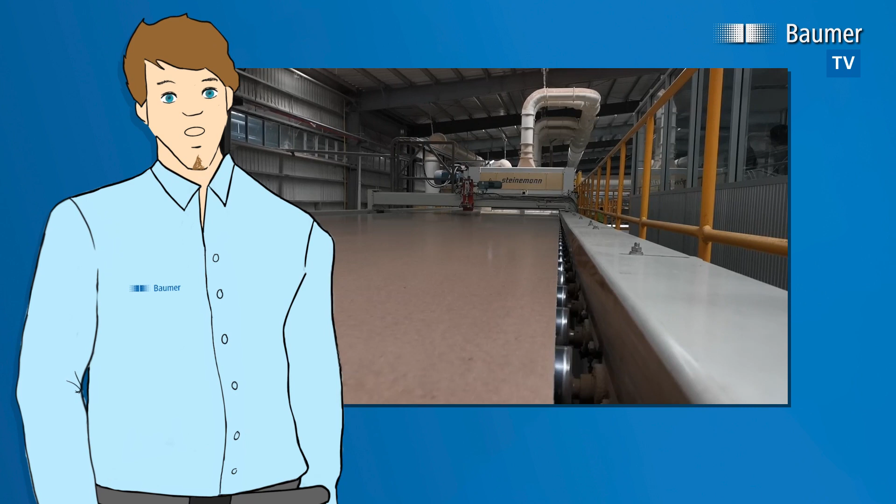Today, a Raw Board 4.0 system will serve as an example for the cooperation with a Baumer inspection system. Such a system is used in chipboard and fiberboard production after the raw boards have been sanded. Other typical applications for Baumer systems are lines for decorating panels and web goods, from coated, lacquered or sheathed panels to profiled floorboards as well as edged and drilled furniture parts.

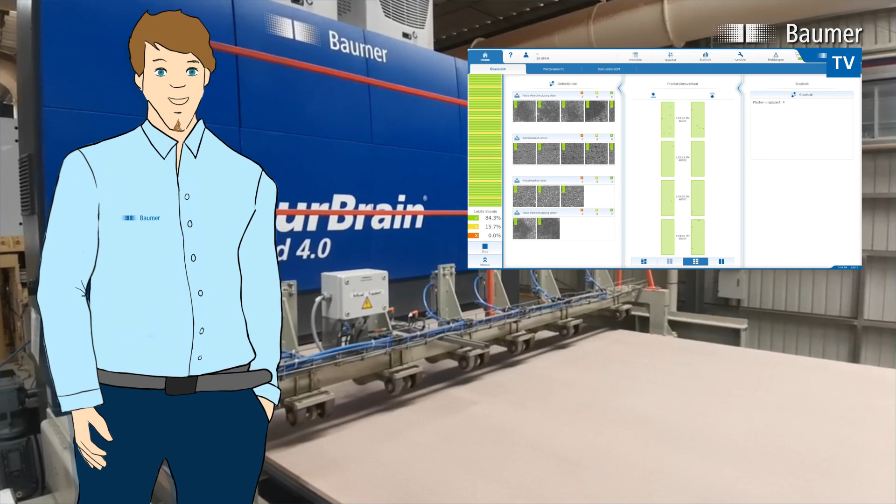Before we take a closer look at the raw board inspection, we would like to take a look at the cockpit of the Baumer system. The operator terminal provides an overview of the current production. The inspection results with the panel qualities, defects as well as the production statistics are displayed scalable over different time periods, from the single view of a panel up to a period of several minutes or hours. Click to select the view and time period for displayed results and statistics.

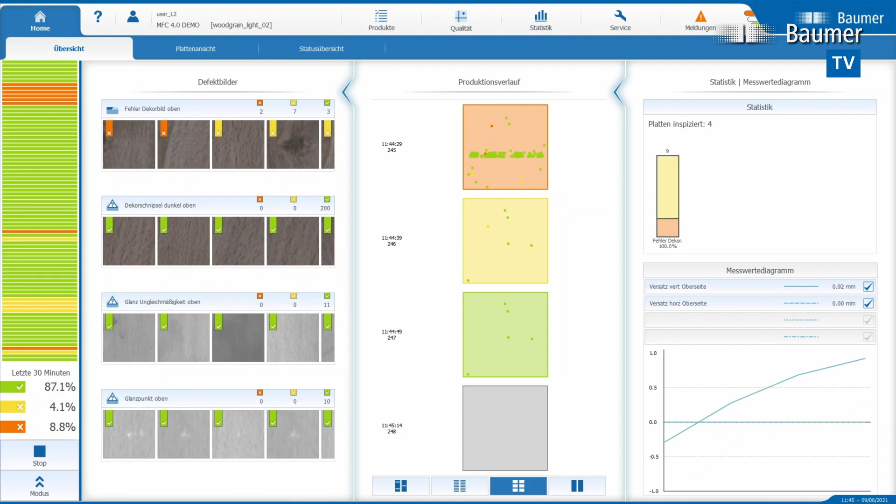The panel evaluation distinguishes between the grading levels: green, equal to first choice; yellow, equal to warning or second choice; red, equal to rejects; and gray, equal to not evaluated. The statistics display provides information about the quality distribution within a defined period. The defect log shows the detected defects in the defined period. On click, details such as type, rating and size of the defects are displayed in addition to the images.

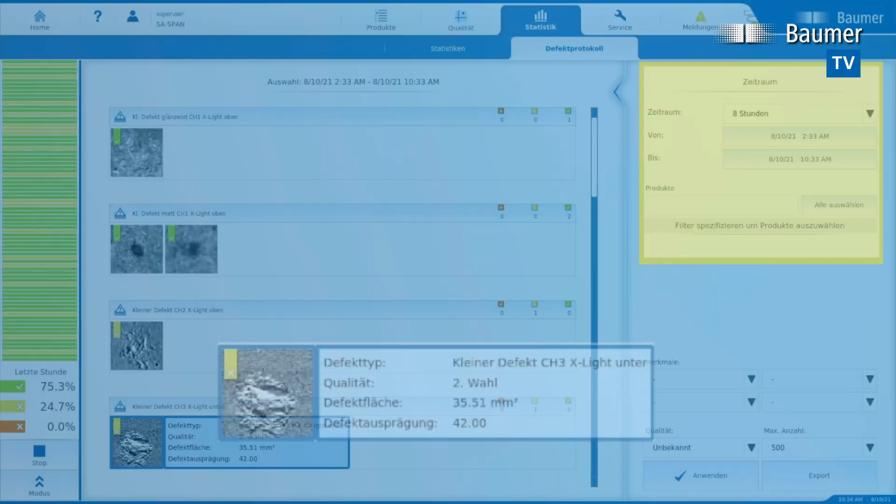Every producer wishes for such a good production. Unfortunately, this is not the case every day. The inspection system alerts non-tolerable defects. In this example, a dent was detected. On click, the position of the defect and the defective panel area are displayed in the zoom.

The following example shows the effect of an unclean grinding process. If the surface is not ground correctly, the system reports grinding errors. If this error accumulates, the sanding unit must be corrected to avoid this systematic error.

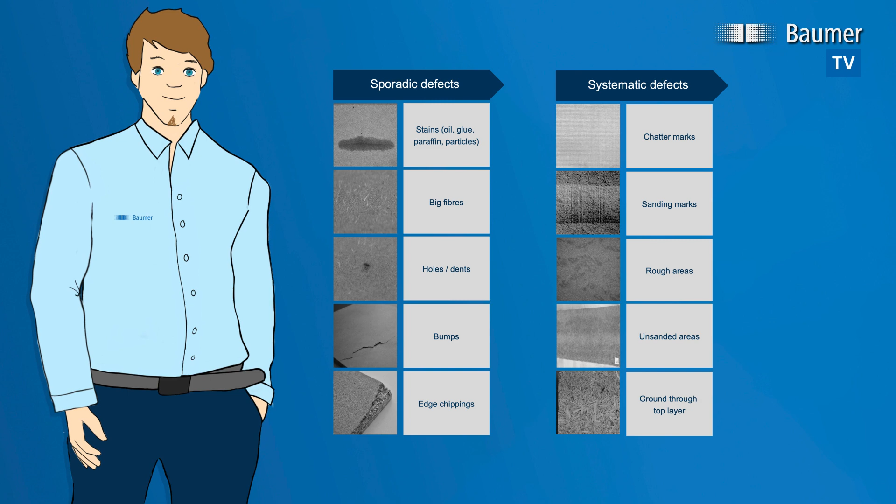In terms of defects, the inspection system distinguishes between sporadic and recurring, systematic defects. Systematic defects include, for example, chatter marks, rough spots, unsanded and sanded through panel areas. These can often be prevented by adjusting the sanding unit. Unfortunately, I have to live with sporadic defects such as too large fibers, dirt or damage. They cannot be prevented, but the intolerable bad panels are sorted out in any case. Sporadic and occasional large fibers are accepted by the system and do not lead to the panel being degraded.

Faults, on the other hand, always lead to alarms. Particles on luminaires or mirrors in the inspection system, for example, create a continuous line in the image, which leads to a degradation of the panels. In this case, it is advisable to interrupt production to eliminate the malfunction.

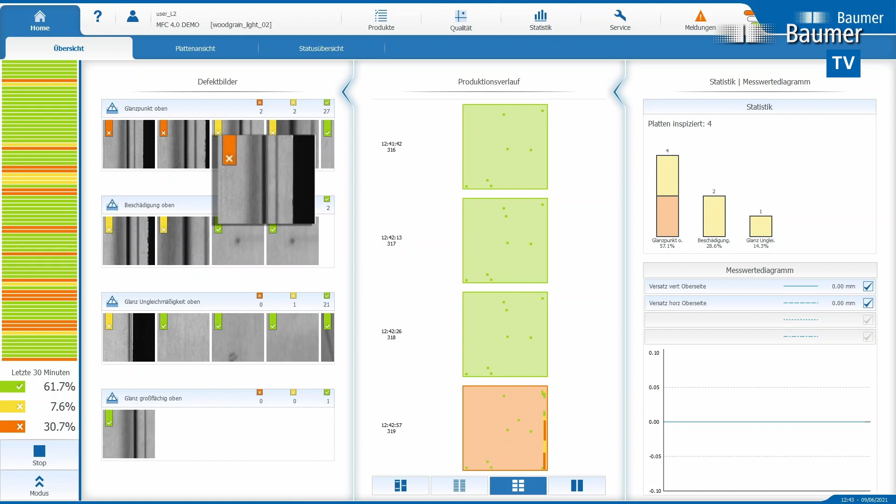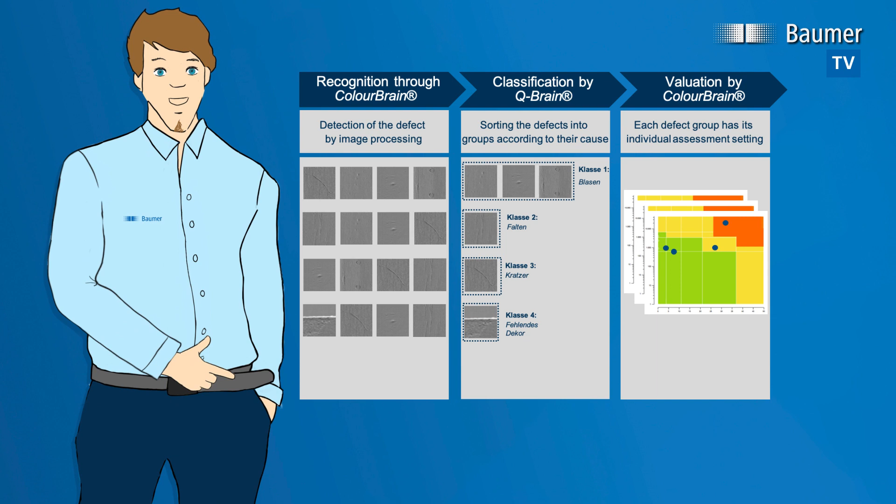By using templates, Baumer creates order and ensures a comprehensible, documented assessment of the panels. The various defects are automatically assigned to defect groups by the inspection system. The tolerances for each defect group are set using quality matrices. The x-axis describes the size and the y-axis the intensity of a deviation.

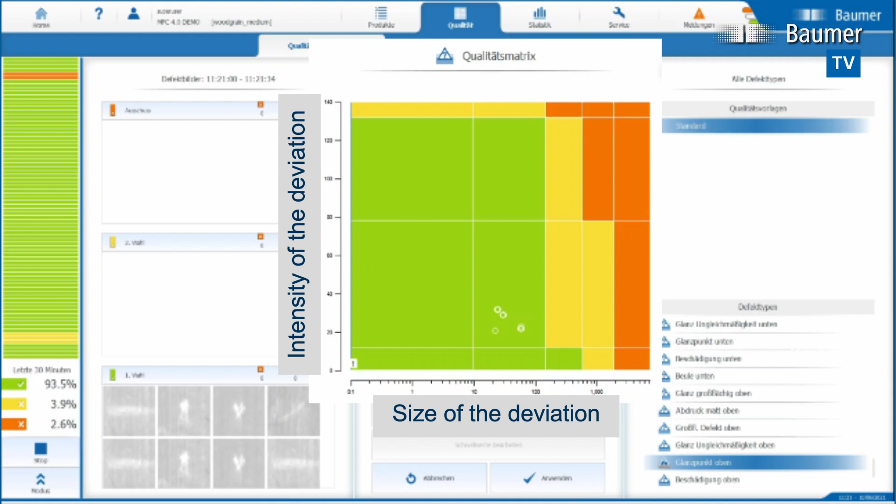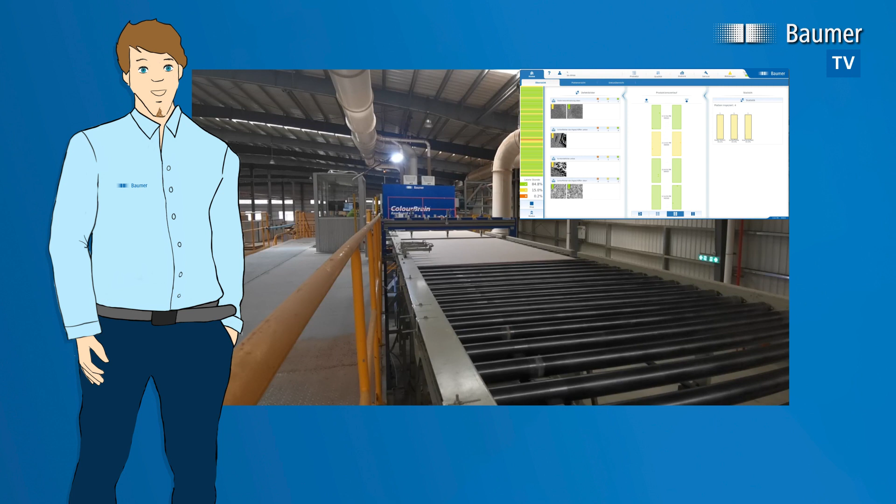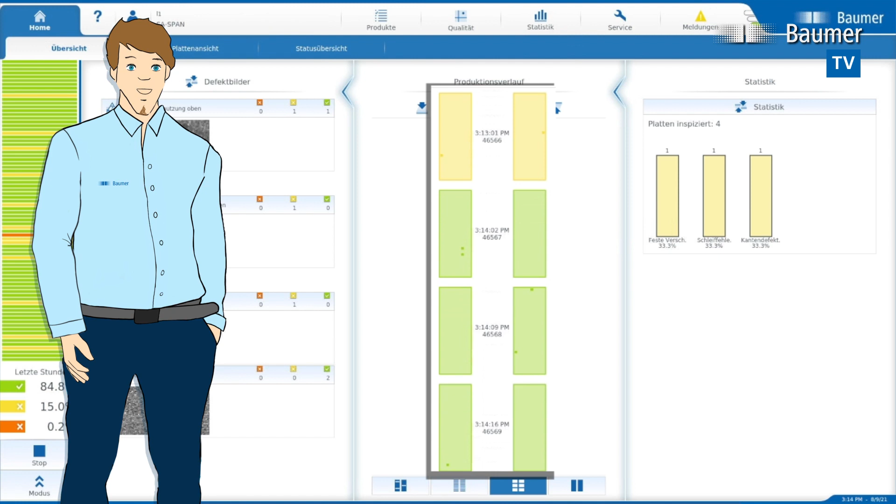So far we have dealt with the tools and information of a trouble-free production operation. But what happens when something gets out of hand? As is so often the case in life, communication is necessary for the timely detection of malfunctions. An essential component for smooth automatic operation is the communication between line control and inspection system. To ensure that both sides are talking about the same panels, each one has a unique identification number.

When changing products, all templates are transferred for the inspection of the next item. During the panel registration, the line control informs the inspection system of the unique identification number of the panel that is about to pass through the inspection line. After the inspection, the line control requests the result for the previously registered panel.

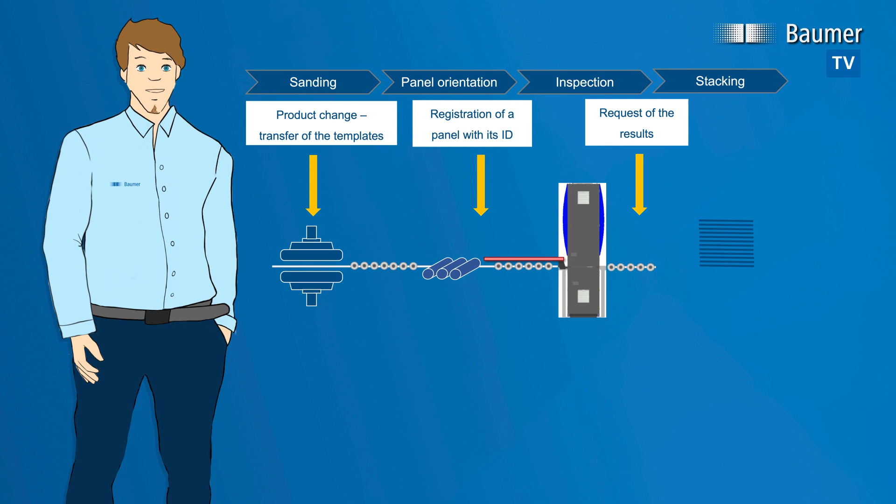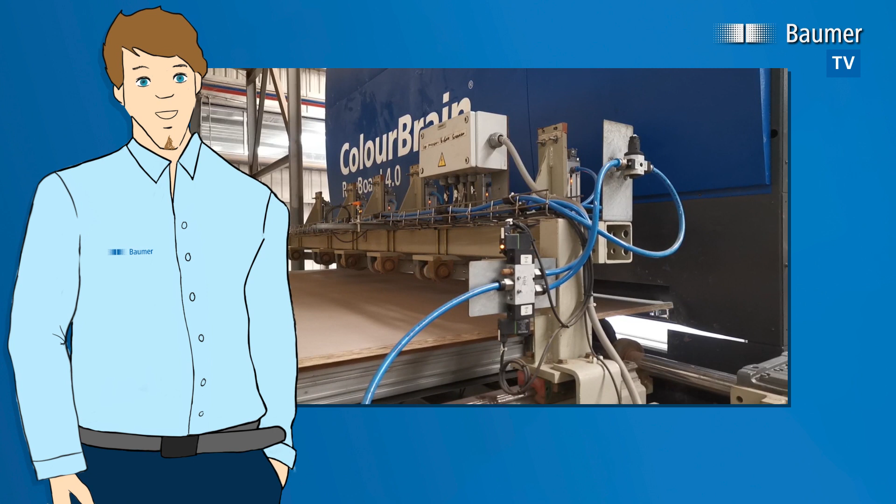Now let's take a look at the communication points in the production line. Firstly, product changes take place between panel removal and infeed into the sanding system. Second, before entering the Baumer facility, the panel registration takes place. Thirdly, after the panels have left the Baumer plant, the inspection result is requested by the line control. At the end of the line, the panels are then stacked according to their quality assessment.

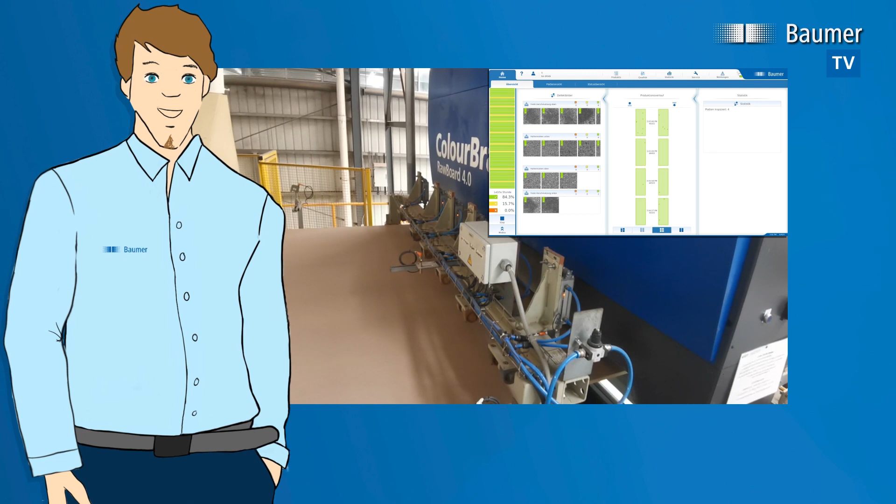Such good production as runs in the background is desirable and can be achieved if the production team works closely together with the inspection system, and as many malfunctions as possible are alerted and rectified in good time.